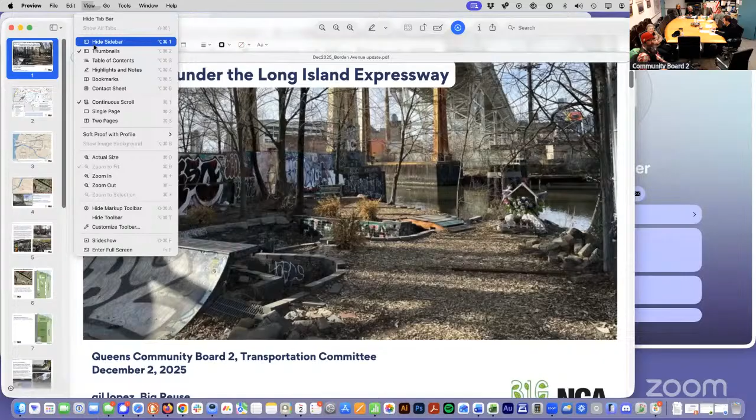So we're going to be talking about a location at the Borden Avenue street end. Borden Avenue is a two-directional road that has separate lanes on both sides of the Long Island Expressway on the east side of the Newtown Creek. The westbound lane ends at the creek, at the Dutch Kills.

Let's go to our next slide. Just for some perspective on where we're talking about, this is a map, basically, of Community Board 2. This map was created by New Yorkers for Parks. It actually details some of the actionable ideas and solutions that they put in this year's report on green space. You'll see that arrow right there pointing to the location in question. It's actually at the intersection of three major potential greening projects.

One is... let's go to the next slide. Wait, Bliss, you're right now located about where 8 is up there. Go back. 8, 16, 8, 6. Right, 30, the red line, right? We're closer to 13, we're at number 13, lucky number 13. Oh okay, alright, 36 is Skillman Ave I guess, or 8 is at like Doughboy Park. We're close, yeah, we're around there. Yeah, right there in Woodside now. Right, but that's what I'm saying, talking about is kind of on the other, more western side.

It's right where the Borden Avenue, proposed Borden Avenue Greenway or bike lane, connects with the Blissville, or Review Avenue Greenway, and it's also kind of at the intersection of the proposed Dutch Kills loop, which me and Willis, along with several other people, are on the steering committee for.

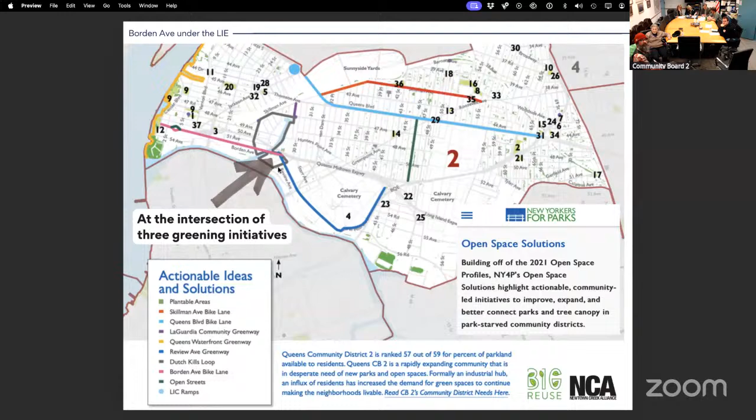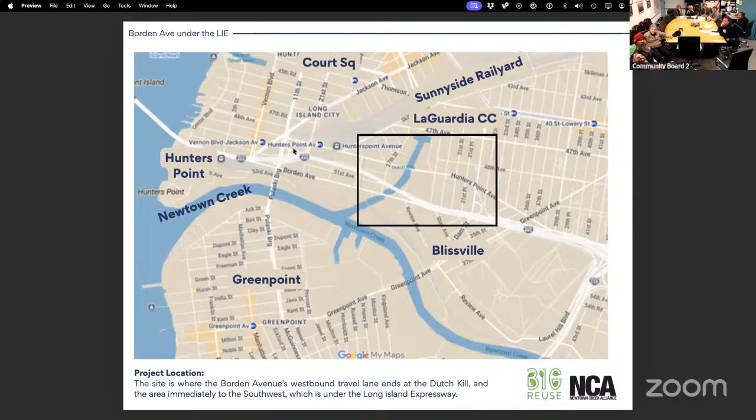But just to get you a little situated in where we're talking about, we can go to the next slide. Good evening, again right by the Dutch Kills, near the LaGuardia Community College, between Blissville and Hunters Point. Next slide.

So this is a street view of the location that is in question. This is kind of an old image, but where we're talking about, we have an aerial there, but part of it is underneath the Long Island Expressway and the other part is in the shadow, so you can't really see it from the aerial view. Let's go to the next slide.

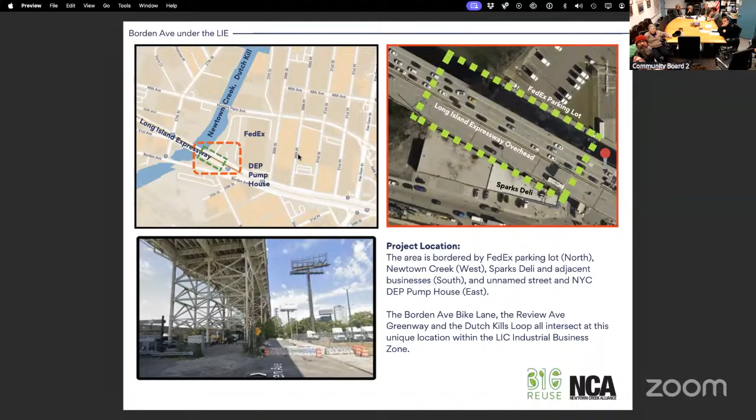I've been working in and around this area as a steward of the Dutch Kills with the Newtown Creek Alliance, as a volunteer, for a decade. I started cleaning up in 2017. In 2020, I really made this particular spot kind of my COVID project, along with some other friends. A year later, we partnered with the Newtown Creek Alliance. We brought a lot of volunteers out. We got a bunch of dumpsters from DEP. We removed 250 cubic yards of waste, which is basically 7 shipping containers full. Along with boats, there's a guy there who's a relative of somebody who has the site.

He was stripping cars, dumping automotive fluids. There's another guy illegally transferring oil, sometimes dumping it into the creek. He got fined for that, in 2013. He's still there doing his dirt, he just doesn't get caught as often. There's all sorts of people illegal dumping. There's people who park their work trucks and just dump everything off on the side when they're done. I don't think they have a contract with DOT. But that was the situation we came into.

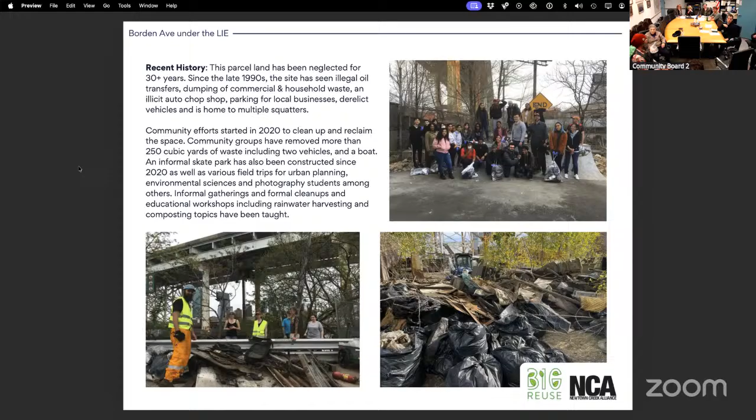We cleaned up a lot of the site over the years, actually. We can go to the next slide. This is kind of what the site looks like right now. On the right, in the light green, there is a blocked off road end because there was an accident and some men went into the creek and died, and I think that was spring 2021 or 2022. DOT put up traffic barriers, so now the street is inaccessible, and some people have built a skate park.

The white rectangles are underneath the expressway. Those are shipping containers and various abandoned trailers and stuff that people who have been occupying the site for a long time still have there. We've managed to push all the junk from the water's edge back a little to the eastern side of the supports holding up the LIE.

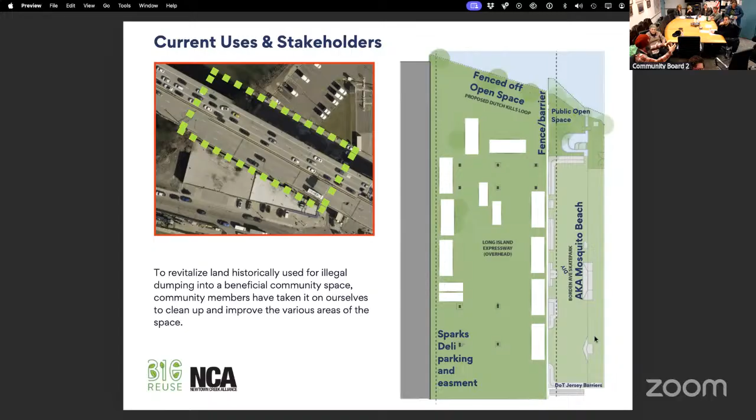Let's go to the next slide. This is what we want to do. The Dutch Kills Civic has already proposed and got a letter of support from CB2 for transferring the roadbed from DOT to Parks and making that a permanent park with a professional skate park there.

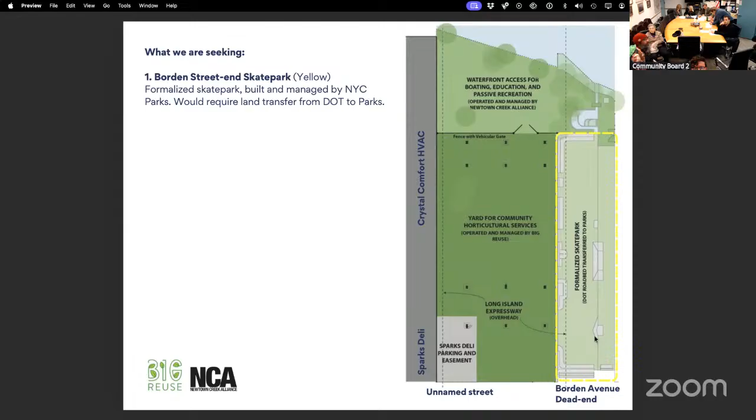Let's go to the next slide. So that's the skate park. It's actually recognized as one of the top 8 DIY skate parks in the world. There's the Broken Bones Skate Club that comes out, with little toddlers learning how to skate. Young people activate it at night sometimes with punk and electronic dance parties. It's young people doing young people things. It's actually really beautiful. Let's go to the next slide.

Do you have anything to add? Well, I'd say on the skate park side, that area was an active roadway, and people were parking there, doing all sorts of illicit stuff late at night, or in the middle of the day. So it was not an asset to the community.

We were already doing cleanup on the shoreline. We had been taking groups from LaGuardia College a few blocks away to do environmental science programming, but it wasn't that great. After a car crash, it allowed skateboarders to do this DIY, not a sanctioned activity, but basically build an informal skate park in an area that was totally closed off.

So it's actually become, I'd say, a much safer place because there's people there—it's like Jane Jacobs, right? There's eyes on the street. People are activating it and using it for recreational physical activity. It's really helped transform this spot from something that was like 'stay away, you don't know what that guy in that car is doing by himself or with others' to an asset, not just for skateboarders, but an inviting place for the community.

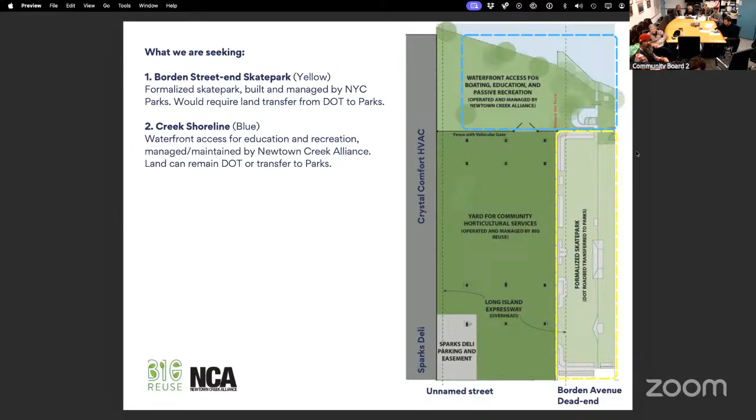I'll let Willis talk about what we want to do with that space. So in general, for us at Newtown Creek Alliance, a big part of our work is focused on cleaning up the creek—it's a federal Superfund site. There's a lot of work to be done improving water quality, but access is also core to our mission because Newtown Creek has been completely inaccessible, especially on the Queens side, for many decades. Without access, people don't see it, don't know about it, and there's less stewardship and care for it. So we've looked at key sites like Borden Avenue because it's publicly owned, whether city or state. We know the street end is city, as opportunities to do that.

There's lots of examples from other places around the city where dead end streets have been turned into pocket parks and amenities like that. So our goal is to have investment into the space so it can continue to become more safe, more inviting to the community, and an asset, a place where there's already shade from the bridge, but there's trees and plants, and it's a place to see the creek and interact with it.

In the coming years, as we have a Superfund cleanup and improvements to water quality, this can be a tremendous asset for engaging more safely with the creek itself. So our goal is really to find ways to activate this. Our organization has worked with DOT and other parts of the creek in Maspeth, on the Brooklyn side, in Greenpoint, to do more of the street transformation.

So this is a very obvious site. I'd also say the Dutch Kills tributary is an extensive waterway, and it's one of the few sections of the creek where there's no commercial traffic because of this bridge that's the mouth. So it's actually kind of an ideal place for doing things like canoeing, because you don't have to worry about a tugboat being there and interference with that. And this is the only place where you can access the Dutch Kills tributary. So all those 20,000 students at LaGuardia, they're a block away from this waterway that is a natural resource.

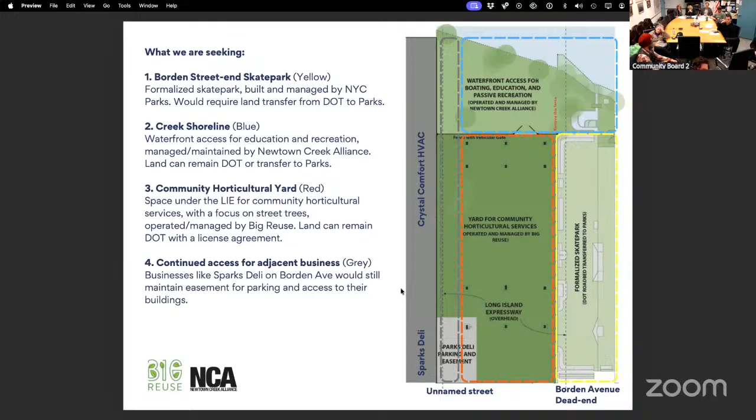We know that there is a need for the people that lease the building to park their cars. So we understand there's an easement under this expressway where Sparks Deli has deliveries of their food and stuff, and those Crystal Comfort HVAC contractors park their trucks and stuff. But there's also some people just honestly living there, and claiming that they're taking adverse possession of city land, which is not, you can't legally do that.

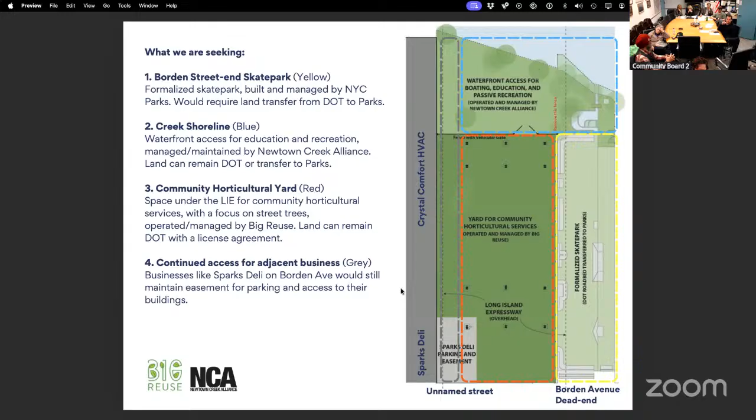I know a little bit about squatting laws and that doesn't happen, but right now we're in kind of like a butting of heads to say who's going to use the land. We have someone who is a scrapper and wants to bring all the trash that they get and just dump it because it's cheaper to dump it than to pay for it to be dumped. And it seems a little bit lawless, but let's go to the next slide.

Because there are some current considerations, the DOT has come around in the past couple months, and they have told the people there that you have to move everything away from the columns because we're going to come and clean the rust and repair this structure.

They haven't given a timeline on that, but they have the people who are there a little frantic. I'll be honest, I've been waiting for this moment. I'm ready for DOT to come clean that structure, clear out everything that needs to be cleared out, and move in community resource and waterfront access whenever DOT is done with that work.

That's the big reason that me and Willis are here tonight, because we want to advocate for community use of this public land and for it to stop being used malfeasantly by whoever stumbles across it and finds free parking for their commercial trucks.

Granted, I'm asking for some free parking, but I'm not a for-profit business. I'm providing environmental programming with city discretionary funding from local council members. We just don't have in our budget to pay $90,000 for a lot to park a truck every year.

So there's other things - the pump house that just got finished across the way, they're starting to remove the construction fencing. There are some people who have parked their lowboy tractor trailers there for years, and they couldn't make that turn because of that construction fence, and they are chomping at the bit to come and have their free parking back.

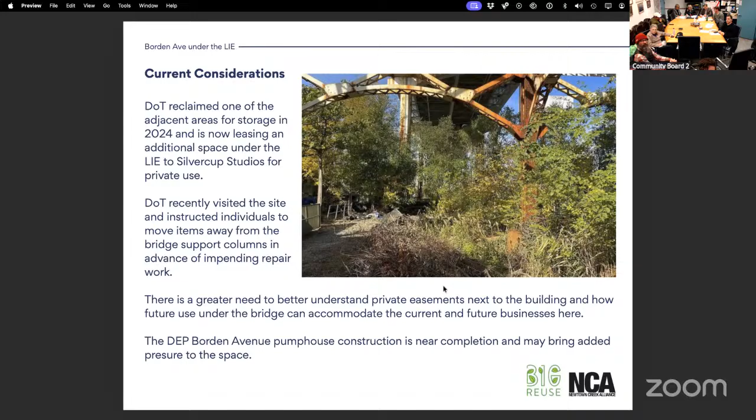We have one more slide. We have a little bit of support from different people. This project was mentioned specifically in Donovan Richards' Borough President report on urban sustainability, both this year and a couple of years ago. The Dutch Kills Loop is part of a plan that grew out of community and grew from a collaboration with Newtown Creek Alliance and the Riverkeeper, a larger, more regional organization.

And the Waterfront Alliance recently did a report and they identified this particular spot out of the 5 boroughs as one of the - was it 4 or 5 kind, there was one each borough - low hanging fruit? This was the one that they chose for Queens. This is like the most actionable, lowest hanging fruit to activate a waterfront and give more waterfront, public green waterfront access.

And then, you know, I think in closing, like we presented a lot, right? We're interested in the skate park becoming more formalized. We're interested in improvements to the waterfront.

We understand those are long-term asks, you know, transfer of land from one agency to another, capital investment. Those are big asks. We are very thankful that CB2 has already seen this presentation, thanks to our friends at Blissville Civic, who are pushing for that. But as Gil mentioned, we feel like there's a little bit more urgency with the space under the bridge, given the history of lawlessness there and concern about what's going to happen. So we really want to work with CB2, our elected officials and DOT to come together on figuring out the best path forward for that space.

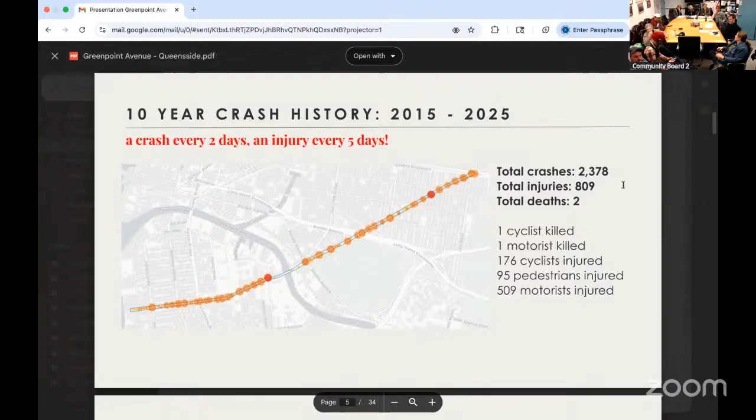There was a 2015 redesign that primarily what it was designed to do was increase vehicle throughput. And what it ended up doing was increasing injuries significantly. On the Brooklyn side, this is both Brooklyn and Queens data, but on the Brooklyn side it's actually higher, those numbers are even worse, and that's where most of the changes were. But if you look at the entire corridor, a 63% increase in injuries is unacceptable.

DOT should have already come back to this and said, we made this street unsafe, we need to figure out how to fix it. So they haven't done that. We decided to start asking them to do it.

Something I just want to also baseline here, which I think is important for Joe to hear, and for you all to be aware of, which was that after that death, his name was Oscar De La Rosa, and he was hit and killed December 7th, 2023, at the base of the Greenpoint Avenue Bridge at Kingsland and Greenpoint.

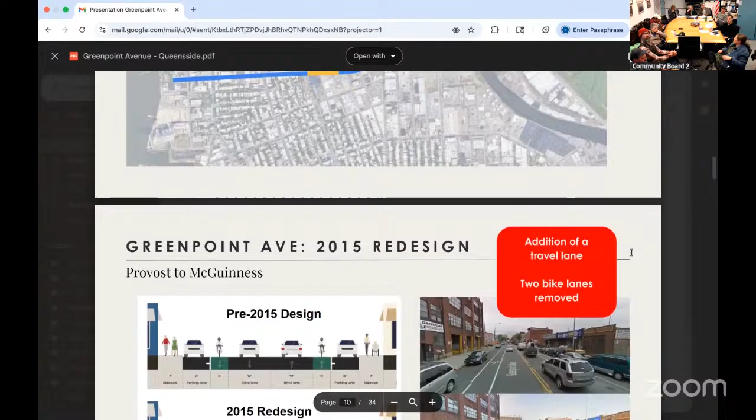And so, yeah, when we presented this, I will say I'm not representing the community board tonight, other than I can speak to the work, the walkthrough we did, which we'll get to in a minute. I'm here as a citizen. I have been working with TA on some of this work. We did a thing with David and Western Queens that we will get to in a minute as well. Anyway, I'm not representing the community board. I'll make that clear.

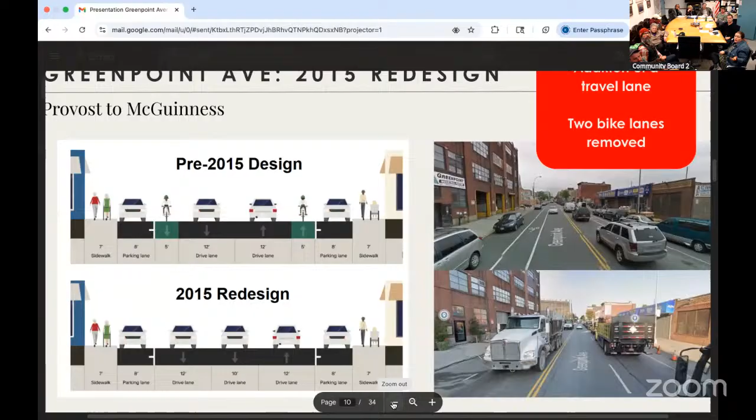But what we did when we presented this to CB1 is we went block by block and said, here's what the design looked like before 2015, here's what it looks like after. You can start to see why those injuries and crashes went up. We added a travel lane, which every time you do that, it speeds up vehicles. We took away bike lanes. They weren't protected bike lanes. We do still have bike lanes in other parts of the design, but there were places where they just got eliminated entirely. So you're in a bike lane and suddenly it just disappears and who knows what you're supposed to do.

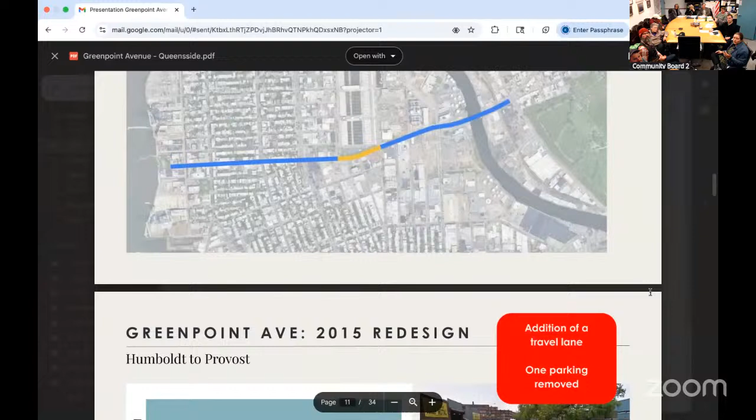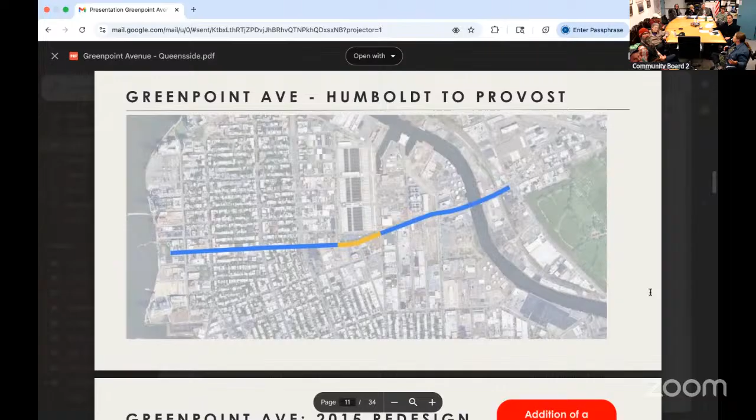So that was Provost to McGuinness. And as Kevin mentioned, one of our main goals here is to bridge these missing connections in the bike network, because McGuinness Boulevard is a fantastic bike lane that we also spent years fighting for, are still fighting for. There are people in this room that joined us in that fight. We appreciate it. We want people to be able to get from Queens to Brooklyn safely, and to our waterfront parks and other spaces.

Yeah, so we don't really need to go block by block for you all, I don't think.

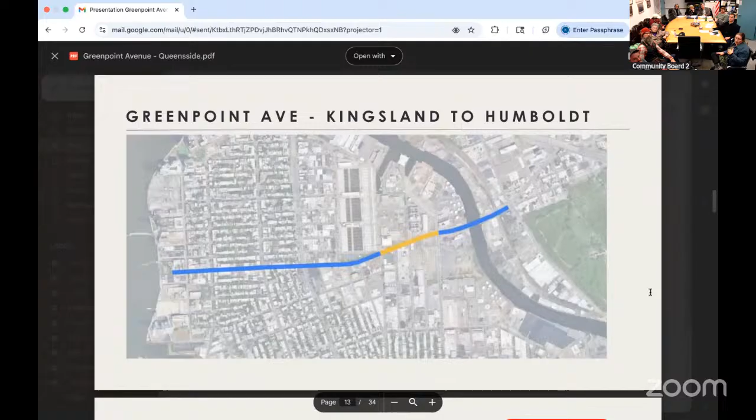But the places that we really saw, like we get to Kingsland Avenue, this is where Oscar was killed. The gentleman was killed. This is the current condition of that roadway. The road is in really terrible shape. You can't see the markings in the street. There's industrial traffic, and behind where the camera is, that's also where the Newtown Creek Nature Walk is. There's a bike lane on that side. That's where NCA's offices are. So there is much more, especially with the opening of the Nature Walk, a lot more pedestrian and bike traffic, I would say, as well as on Edgewood Street. There's more people on the Kingsland side for sure.

Since that entrance to the Nature Walk opened at Kingsland, they haven't changed the light in any way, they haven't improved the roads. So it's really scary to get onto the bridge, get off of the bridge, cross Kingsland, and try to turn onto the bike lane on Greenpoint Avenue. I live on Kingsland and I try to avoid this intersection at all costs.

Is there a place that I can plug this in? It's starting to die. Do you guys have a charger? Is there a plug? Right here. Yeah, sure.

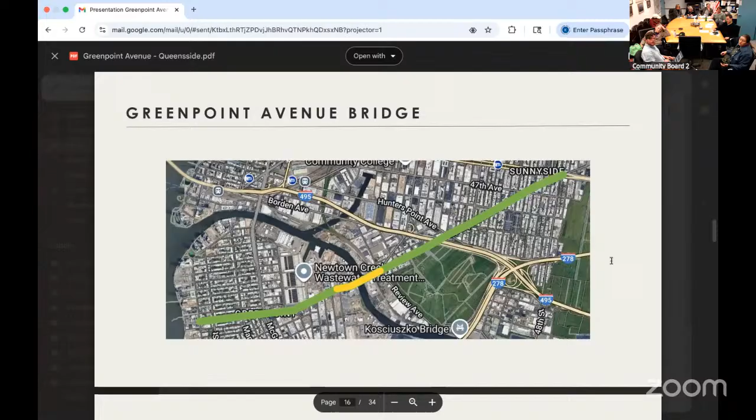Do you want to keep going?

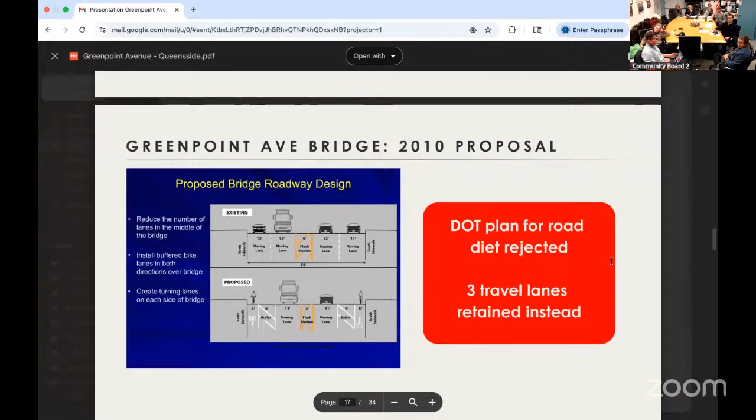Yep. This is something that we discovered as we started to go back through the old DOT proposals, and this is pretty wild. In 2010, what was proposed for the Greenpoint Avenue Bridge was a wide bike lane, 6 foot wide, with 9 foot buffers on either side, and making the Greenpoint Avenue Bridge 1 lane in each direction, which would have matched the conditions on the Greenpoint side of the bridge, which at the time was basically parking and bike lanes and 1 lane in each direction as well. They would have had the bridge match those conditions. What ultimately happened was that project at the time was killed by the then assemblyman in the area, as well as one of the companies that operates in Greenpoint, killed that plan.

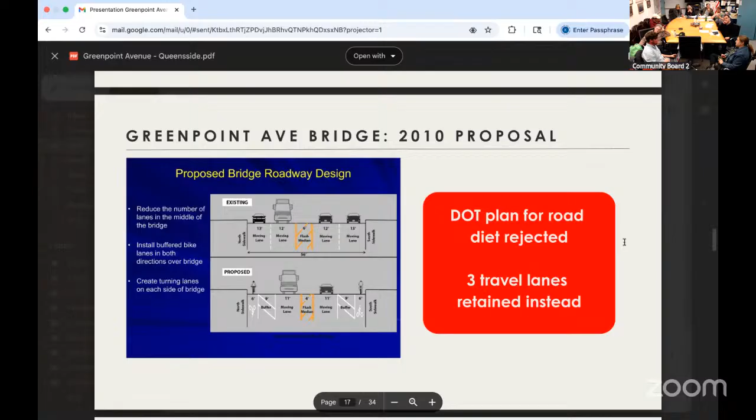Nothing happened after that for 5 years. But we had this plan, one plan, on the table that would have greatly increased safety and clarified traffic conditions 15 years ago, which is pretty frustrating, to be honest, as we look at it, especially because a road diet, even at the time, this is what this is, the narrowing of a roadway, at the time would have been probably one of the earliest ones in the city over the Greenpoint Avenue Bridge, and it was ultimately rejected. Instead, 3 travel lanes were retained. Travel lanes on Greenpoint Avenue were ultimately increased in 2015, and on the Greenpoint side, injuries increased 63%.

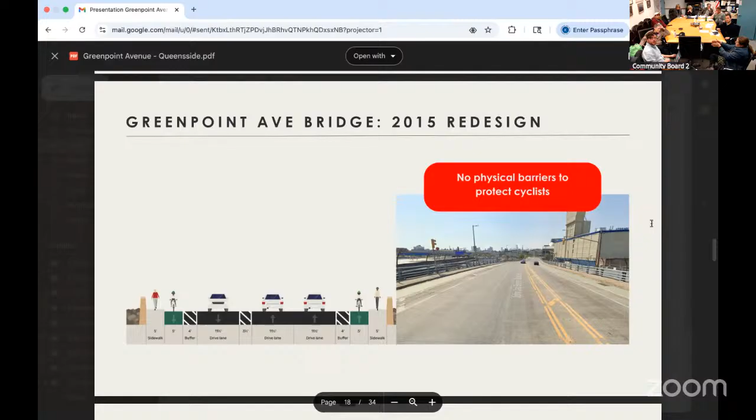And there's been a death. At some point, there is the bike lane over the bridge. There used to be buffers there, physical plastic delineators that DOT decided at some point to stop replacing because they got hit by so many trucks and other vehicles without that 9 foot buffer. Now there's just a very narrow buffer between everyone and no physical protection anymore because it's too expensive to replace it.

Even though it's very possible in this space, the bridge itself is a double bascule bridge. So you have the counterweights down below, but on most of the bridge, probably about 70%, you could very easily have Jersey barriers in that hatched space, and then plastic delineators in the middle where the bridge lifts. It would be a straightforward and simple thing to do at a base level, and something we asked for after the death in 2023.

Is that the same kind of bridge construction as the Pulaski, which has Jersey barriers? Correct. But when they constructed it, it had the Jersey barriers with more protection because that was a major reconstruction that took several years. But even with the basic materials that DOT could roll out tomorrow, things they have sitting in a warehouse, the bridge itself is something that can be made much safer.

But we're talking about the whole corridor. Most of that stuff's actually sitting under the bridge, three blocks away, literally underneath. They literally have Jersey barriers underneath the Greenpoint Avenue Bridge. We're like, just bring them upstairs. We'll help.

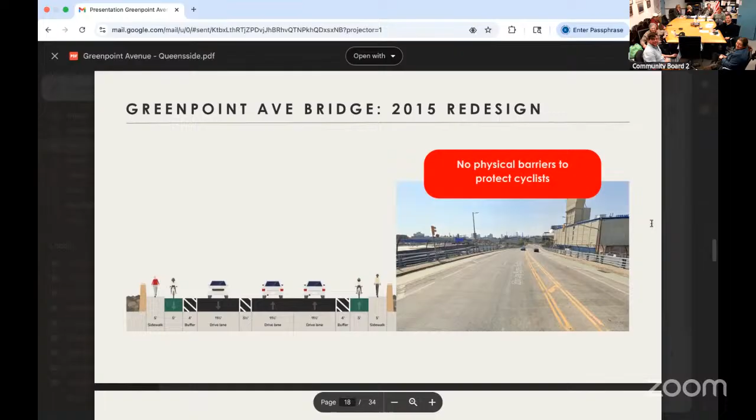Anyway, moving over to the side that you folks are a little more familiar with. There is Gale Avenue to Hunters Point Avenue, the I-495 overpass section.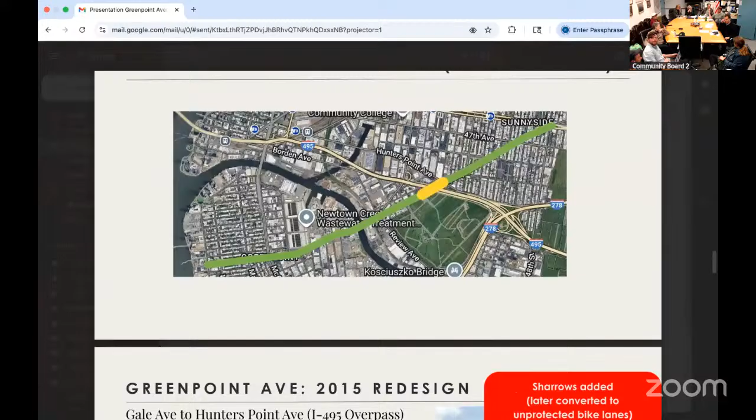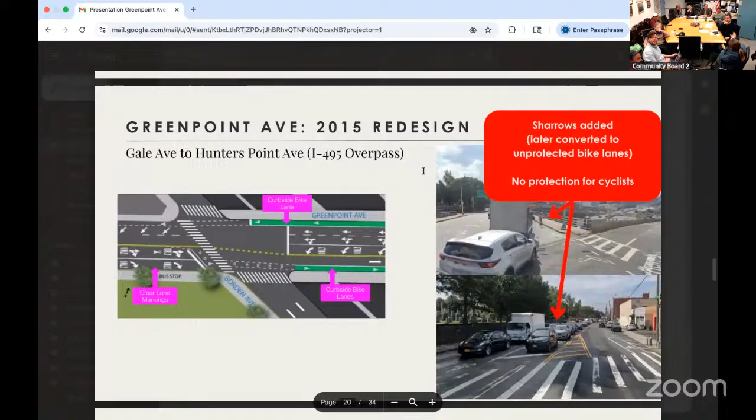This is just that segment that's horrible that goes over to the LIE. I don't think any of us really refer to it as Gale. I'm focused on staying alive when I'm moving through traffic at a highway entrance. There's no protection for cyclists here.

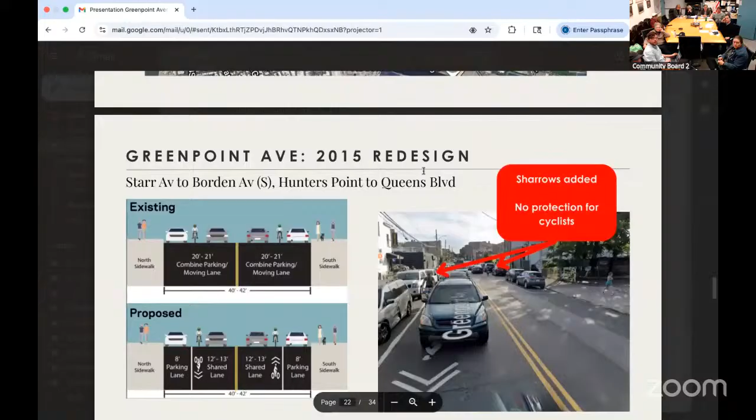Starr Avenue to Borden Avenue and Hunters Point to Queens Boulevard are two other obviously prominent stretches along the way here, and you folks are the experts on this. Again, sharrows, no protection for cyclists. It's awful. And also you have folks parking all the way up into crosswalks where they exist, blocking visibility. It is a very, very unpleasant trip along the corridor there.

Tom Matuzas knows Gale, of course. Okay, where am I here? Hold on, oh, there we go.

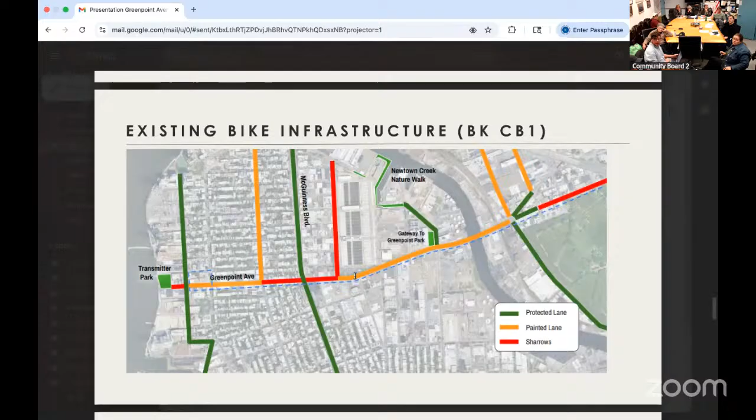So for us, the missing link, going back to some of our maps, you can see on our side green is protected lanes, orange is painted lanes, and red is sharrow lanes. We don't have this map for you all, unfortunately, but you can see the East River Greenway, the McGuinness Boulevard bike lanes, and then the hard fought Review Avenue bike lanes that you all came through and got done, which is so amazing. And right down the middle, the belt runs right through it. It's a real mixed bag, between sharrows and painted lanes across the board.

This just zooms in on that, but specifically also looks at bus routes. On our side, there's lots of areas that need crosswalks. There's bus stops, people crossing in the middle of the block to go to a bus stop, these long stretches with no ability to cross the street. So it's a transit corridor, obviously, as well.

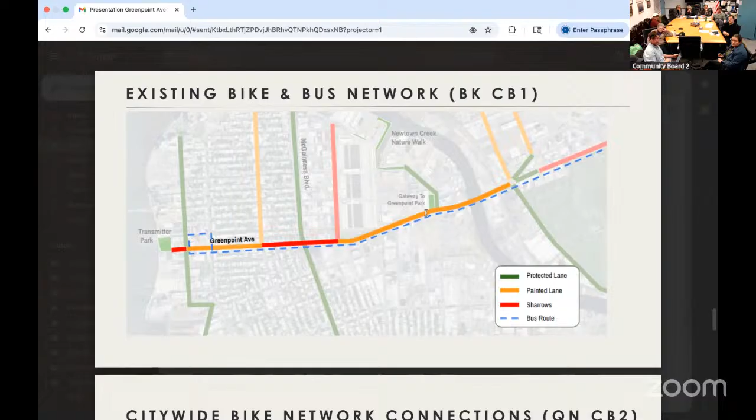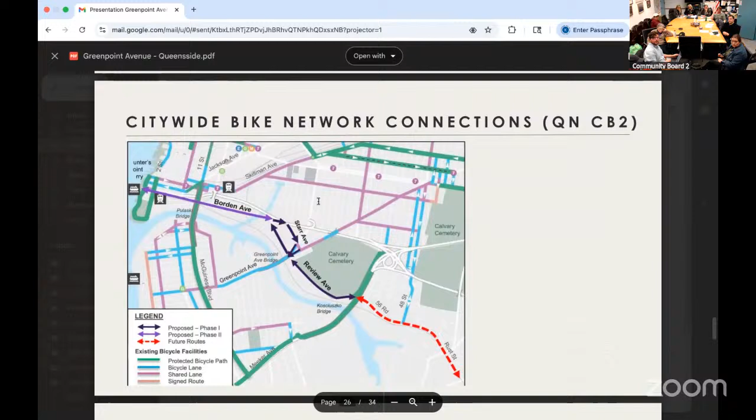This looks at the citywide bike network connections that are here in Queens CB2, and shows some of the future connections that folks are looking at and talking about and thinking about.

This gets into something folks from Western Queens TA are going to get a lot more into in a minute. A lot of these conversations began around the Sunnyside ride that many folks here participated in, where a lot of these different spaces were identified as priority investments for safer spaces, which we hugely support.

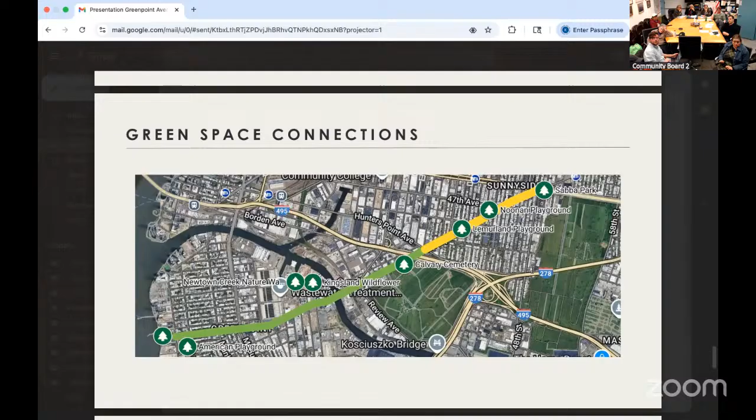There's an opportunity to connect the open spaces. Some of the parks are just along the way here, right? There should be more of them. That's our hope - green spaces, spaces that folks want to be.

Just a brief timeline: on October 20th we had a community visioning and feedback session that brought Queens and Brooklyn together, where the two Queens and Brooklyn TA committees came together in Long Island City.

Some of the feedback we heard from that session won't surprise anybody here: intersections are confusing, dangerous, and unsafe; sidewalks across the bridge are too narrow; bike lanes and sidewalks are dirty and obstructed by trash; bike lanes are often blocked by parked cars and trucks; and a lot of pedestrians and cyclists avoid using Greenpoint Avenue and the bridge due to these safety concerns.

We brought that back to our community board, CB1, on October 30th. There was a discussion at our transportation committee, and then the committee did a walkthrough on November 16th. Meryl, if you want to speak a little bit to that.

Yeah, so as Kevin said, we presented to the committee - these are the concerns, and they're all aware of it. It's already in our district needs statement. So these are the things that we identified from that visioning session that Kevin mentioned.

And then we decided to do a walkthrough, and it confirmed all of the things that we already knew, which is that there are a lot of places where people are crossing to get to a bus stop, or just because there's no crosswalk for a long stretch, no stop control, no marked crosswalk. In some cases there's an unmarked crosswalk, and people are using it.

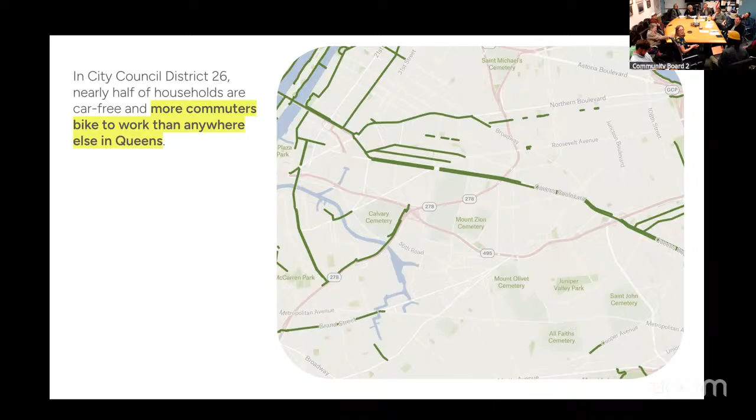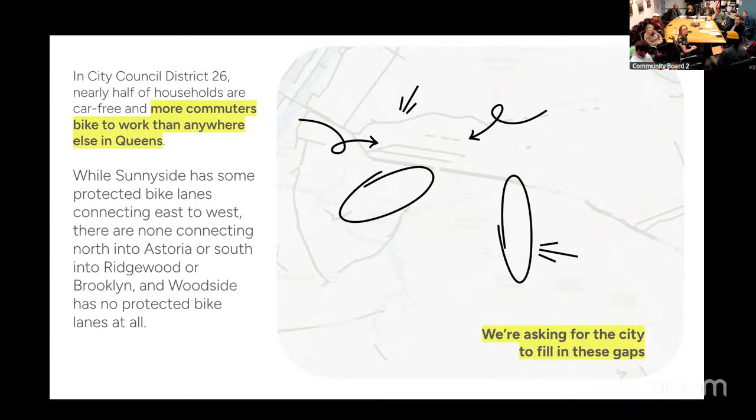And then just a good, safe way to get across the LIRR tracks. There is, of course, Honeywell, which has a painted lane. Maybe there would be room for protection along it. 43rd, if it kept going—he'll talk about specific examples—but just ways to safely get across that bridge. And then also a big gap over in Woodside for getting south from there. Kind of back to you.

Yeah, so the idea here is just better connecting the protected bike lanes that we have, because for a lot of these cases, you're thrown into unsafe situations, as we were talking about. There's a mixture of how the roads are set up, and also what uses those areas have, such that you can go from a pretty safe protected area, and then I just clench to get through the part that I know is not safe until I can make my way back to a part that's protected. So really the idea is to fill in the gaps between those areas and have continuous protection.

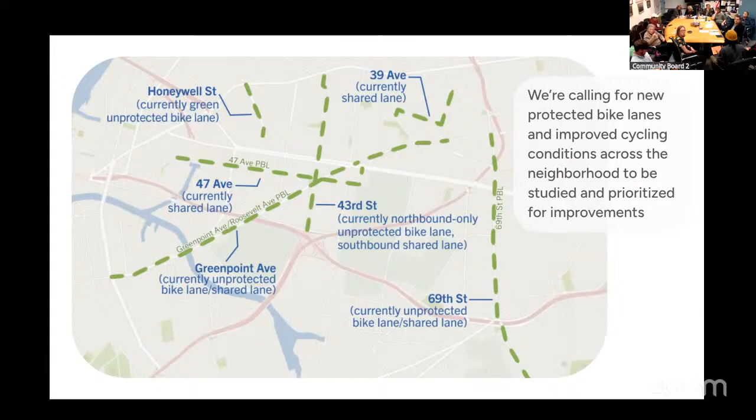So this is the big picture of what we're talking about. These are, as you saw in the last presentation, a picture of this, and what Alice was just talking about—these different areas. We can go into just saying what the thought process is here, just to really understand what we're trying to achieve, not necessarily being prescriptive to say it must be these streets or else you want nothing. So really trying to get the motive behind these and just saying, let's study it, let's see what makes sense in these areas, how can we actually be protected the whole way through.

But for Honeywell, connecting to the existing project in Astoria for 31st Street that goes north up towards the park—there will be protected bike lanes there in the process of being installed, it's told. Connecting in that way to connect to the infrastructure that is going to be built there would be really useful, as well as 43rd Street north of Queens Boulevard.

And that example that we chose before of getting from the library to the Museum of Moving Image—if you just go straight up 43rd Street, you get put out into Astoria a couple of blocks away from the Museum of Moving Image. So there are a lot of attractions in that way, and also just having this straight route there.

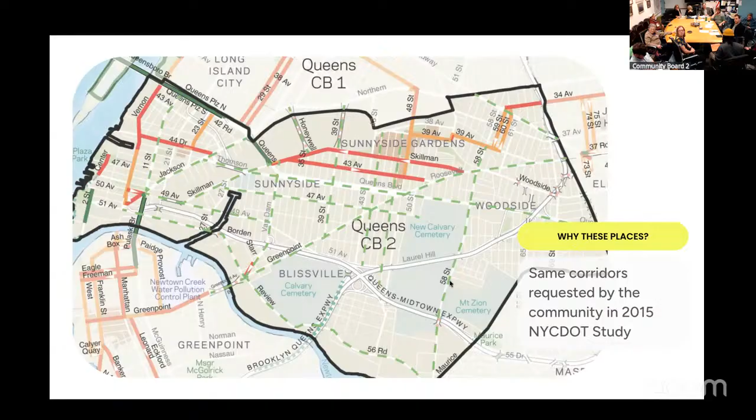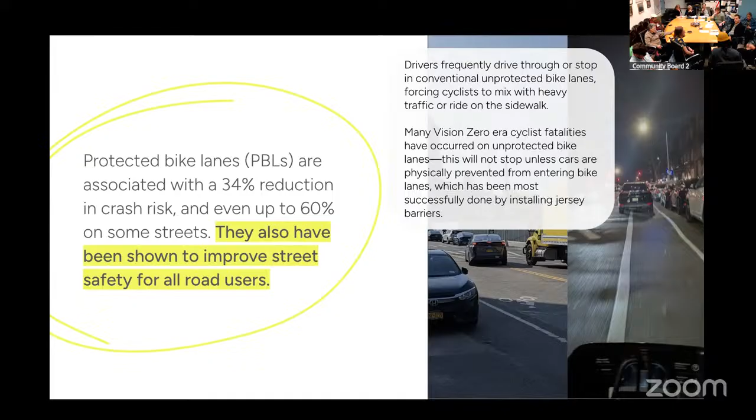So this isn't the first time we've talked about or thought of this. As you can see, the protected bike lanes is what we're really advocating here: a 34% reduction in crash risk, and up to 60% on some streets. Obviously having a protected bike lane not only improves the experience for bikers, but for pedestrians and cars in some cases as well.

So just to talk to the community side of it: we've had two bike rides along parts of these areas to draw attention to them. We did a spooky ride most recently in late September, early October, and we're trying to gain support and point out some of these areas, and we all participated as well. We're getting signatures and trying to garner as much support as we can for these particular areas.

Can I interrupt you before you move on?

Yeah, that's our assembly member right there, riding on a fixie bike. And what drives me crazy is she lives in Ridgewood and her office is down the street from me in Sunnyside, and she does not feel safe riding a bike there. It would be such an obvious commute for her.

It's funny because when we were talking about the route, we wanted everyone to draw attention to this, but we also didn't want to put anyone in danger. So we kind of said, look, that one, because some of them are a little hairy.

Some of the stats: just in these proposed bike lanes, there's 130,000 New Yorkers, and over 80 schools within a quarter mile of these bike lanes. So it does create a large wake of who would be affected and able to utilize these. The whole intention is to give all Queens residents in this area a safe way to get around and to visit some of the sites in the general neighborhood, some that we've talked about.